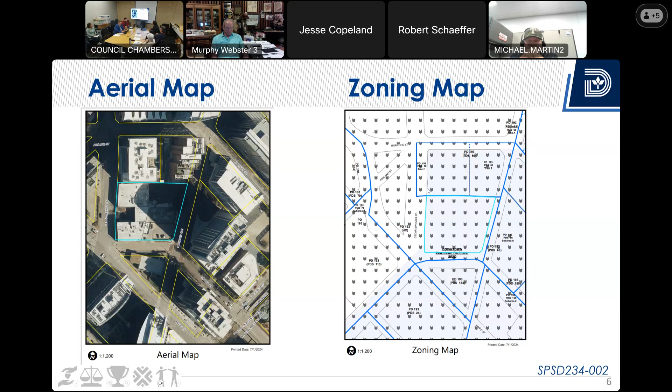I guess I have to show this. Okay, so it's this highlighted area. This is the building, and the proposed roof sign will go in this section. If the applicant will correct me if I'm wrong -- you're correct, sir. And then here is the zoning map for the district.

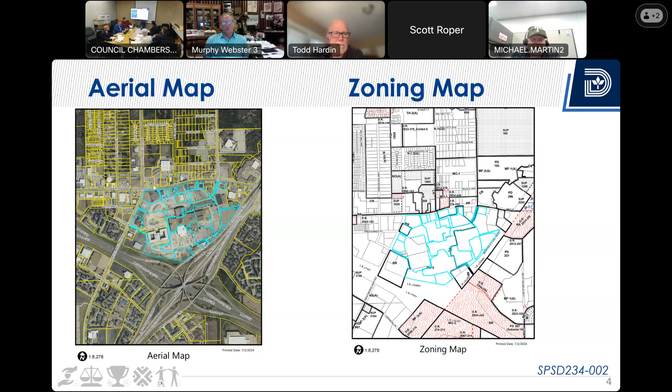But as you see, if you're driving around, you will not know what is back there. If you look at the surrounding areas, there's a lot of signage in that area, and this is to provide advertisement for that particular site that is visible from the right of way.

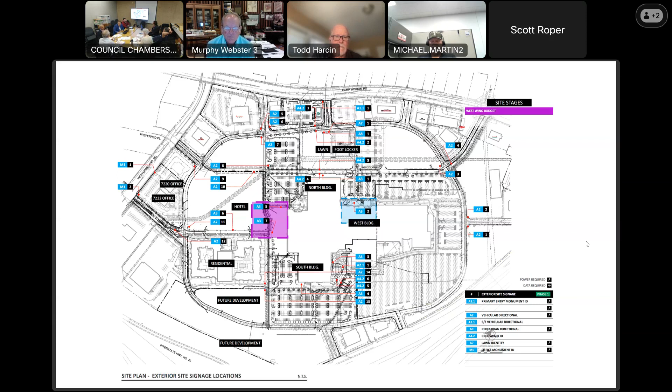If we go through this presentation quickly - this is the overall site. You can see we have numbers in blue talking about the sign types. As Poole said earlier, we're going to get through and do some revisions and tighten this up a little bit. I based the SPSD off the West Village SPSD because I think it's similar in that it's one property that has both residential and non-residential, kind of an activity and entertainment area. I just need to tighten it up a little bit.

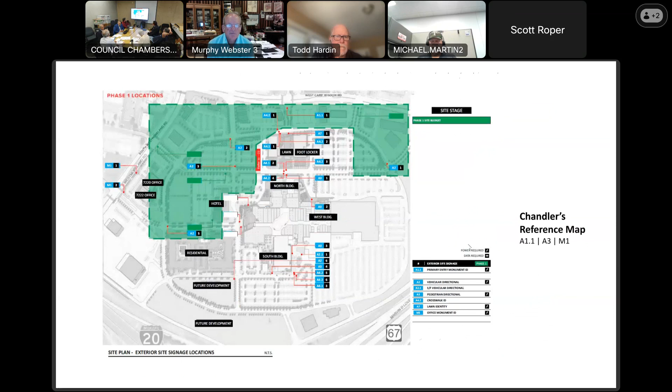Next slide, please. This just shows the phase limits. This would be the first phase to the north. Next slide, please. These identify the different buildings and kind of tie it all together.

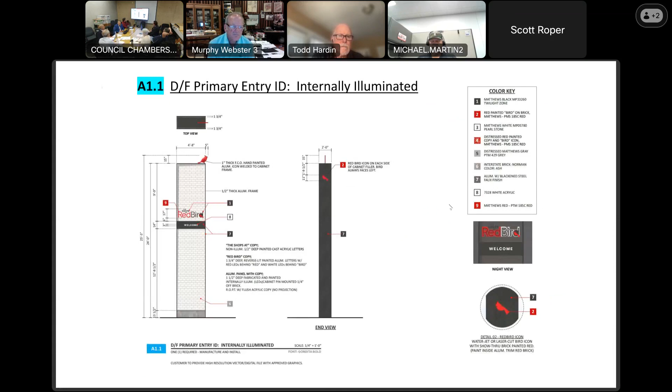These are the primary entry signs. They'll be internally illuminated, they'll reference Redbird Mall, and they'll be at the entrances as shown on the original map. Next slide, please. And these are pedestrian directional signs. They'll be distributed throughout the property to help pedestrians - more of a pedestrian scale than an automobile scale.

These look similar to the ones I saw out there, and they are pretty much the same - about the same, but they'll have the logo on it, and masonry at the bottom and at the top. These are not illuminated signs.

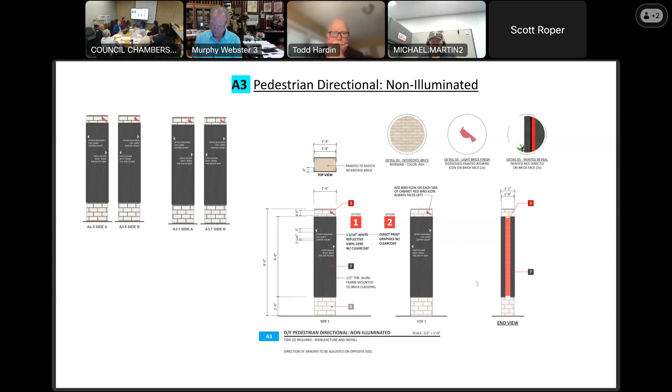These are, again, wayfinding crosswalk identifying signs. They're all going to look the same, with masonry on top and bottom, same colors, same logos.

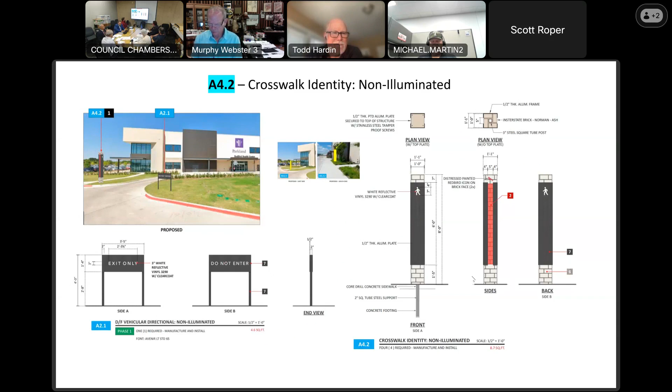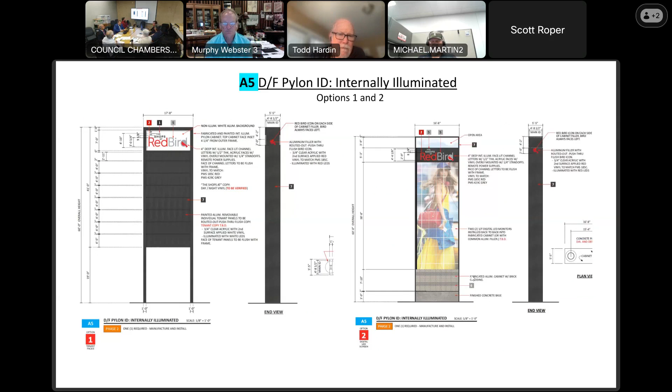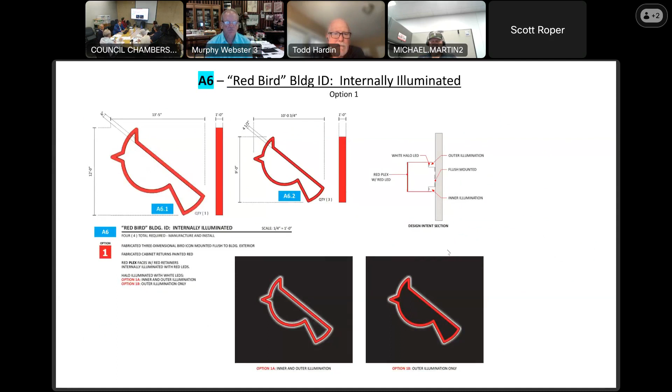Next slide, please. This is what the Redbird will look like. I think it looks really cool, and these will be used throughout the project. Next slide, please - another version of that.

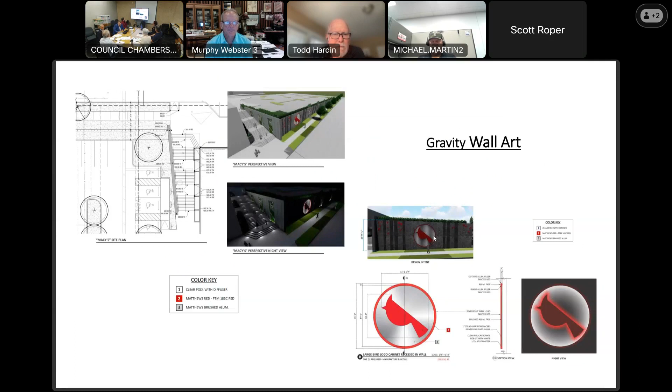We're also allowing for wall art. These will be a logo, but not a commercial logo - it just identifies the project. You can see both daytime and nighttime views. They'll be illuminated, internally illuminated. Next slide, please - some more art. I really like this one with the trees and the red birds kind of tying everything together, and that would be on the walls leading from the different parking areas.

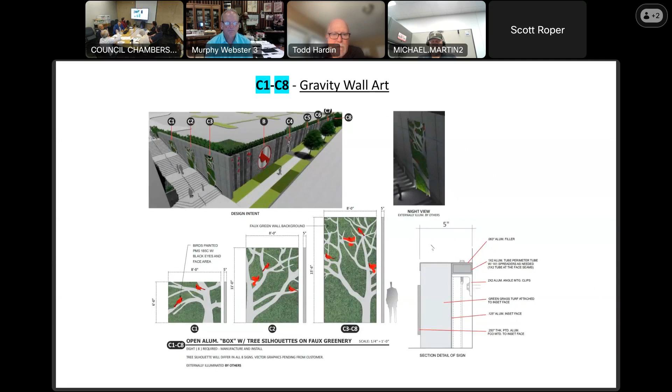These identify the different birds and how they're going to be on the branches, giving a close-up view of what they're looking like and how tall they're going to be.

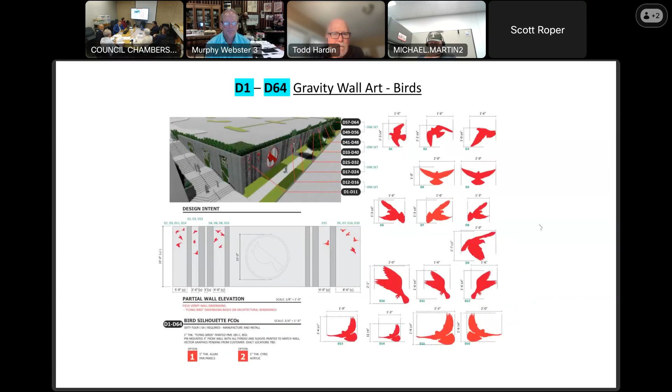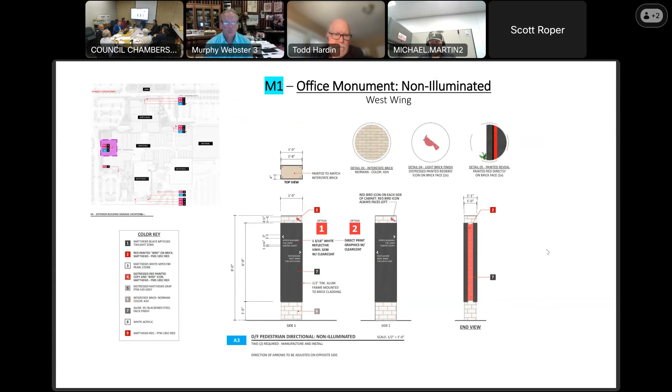And this is the non-illuminated version of it as well. As you see, they're all tied together - same colors, materials, sizes. So it's all going to be very unified, and once you get in there, you're going to realize you're in a special place, and the signs will help with that. This is a monument sign that would help - this is over on the west side.

Can you do tenant identification now? I'm sorry - tenant identification, that's what it is.

So wayfinding there as well, tenants. Next slide, please. This shows possible locations of logos. Next slide, and that's basically it.

I'm going to be meeting with the sign staff here shortly to make sure my text matches what we've just seen, and we'll come back and talk to you about it. But I wanted to give you an overview.

I think it's great. If you haven't been down to Redbird Mall, you should. A lot's been going on down there. We have residential, retail, office, community incubators, and the strip retail around it is being upgraded.

We do have a Chick-fil-A there, a Starbucks, Whataburger up there. So we're getting rid of what I'd call the legacy buildings that have been there since the mall was in decline, and upgrading them.

As Oscar pointed out earlier, we have a festival lawn that will be for community events. That's the terrace lawn that had the lifeguard stands in it. We're going to have that for events, food trucks, festivals, and neighborhood gatherings. So I'm here to answer any questions.

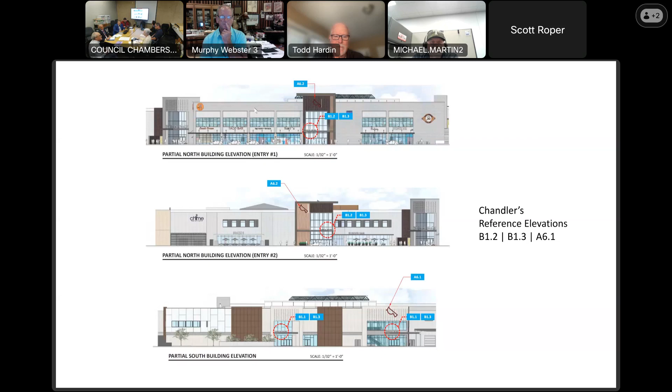Okay, and good to meet you. Good to see you. Rob, don't run off, I got a couple quick questions after we go off. Rick, well I'm gonna go off and wait outside for you. Oh okay, that way y'all can talk bad about me. Okay.

Then we still have the minutes to approve. Did anybody see the project? Changes, anything that needs to be marked? I didn't see anything. Any of you guys up there? They look accurate. If no corrections or additions, then the minutes can be approved as stated.